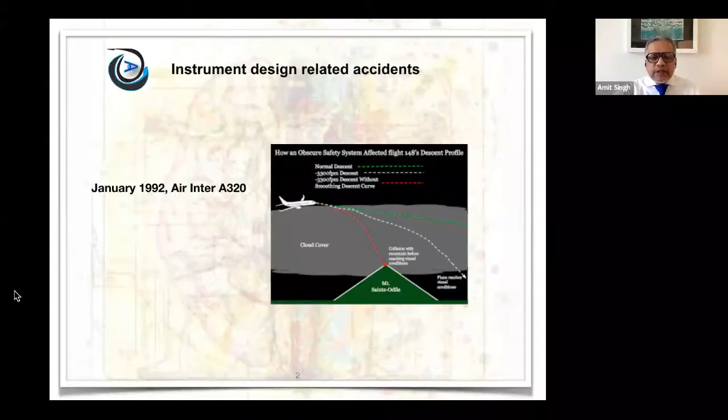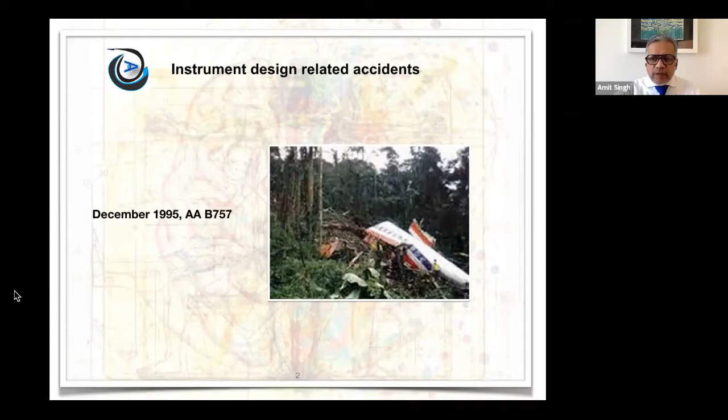This happened in 1990. Then we have the Air Inter, the famous one, when there was a confusion between the VS, the vertical speed, and the flight path angle. They dialed in the wrong one and descended fast, a CFIT accident. We have the Boeing 757 in Cali, where they inserted in the FMS the NDB name; as you know, there are multiple names in the FMS. They turned towards the wrong one, again a CFIT.

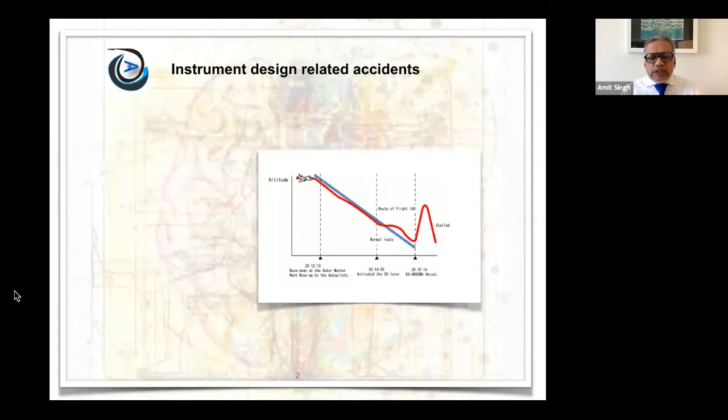And this is the Nagoya. This is on the final approach, and there was a mistrim issue. So the pilots were basically fighting against the controls, against the trim. And of course, at the last minute, there was an upset from which they couldn't recover. This was with China Airlines, Airbus 300.

Now, human error, everybody knows about human error. But are we ready to accept human error, or do we have a plan? Do we need to do something about it? There are statistics available: 87% of the accidents are attributable to human error. But the name as such indicts the pilot basically. So not much investigation has been done beyond just naming the human error. What was it due to? Was it preventable? And what was the situation that the pilot was in?

Why did all the barriers fail? And the pilot is, of course, the last barrier, and the last barrier also failed. That is why we had an accident. But a proper root cause analysis is not always done. Therefore, the easiest thing is to blame the pilot and carry on.

After the three accidents which I mentioned before, there was a lot of criticism about the interfaces with automation. Humans were used to mechanically driven aircraft, pulleys and cables, and they were in control. So they were motivated to fly the aircraft, and whatever inputs were there, the aircraft behaved as per that. With the introduction of automation, there were certain limitations. The pilot was moved a bit away from the actual controls. Maybe the pilot felt a bit demotivated. So what was the design philosophy behind that? That we need to see.

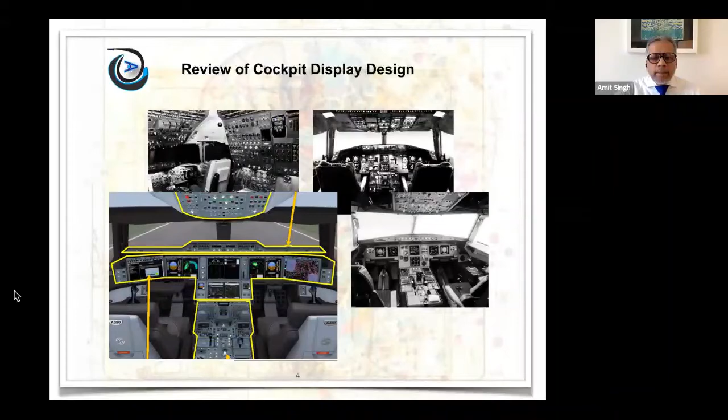Human error analysis, the famous adage, to err is human. So that is what the automation side wants to say. Humans will make mistakes regardless of whatever preventive efforts you take. So therefore, build something that can prevent the human from making an error, basically taking the human out of the design loop.

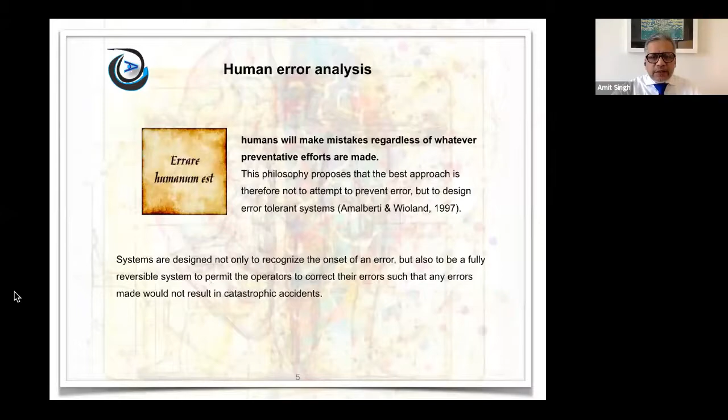So systems are designed not only to recognize the onset of an error, but also to be fully reversible systems to permit the operators to correct their errors such that any error made would not result in a catastrophic accident. So either you say the pilots will make errors and we have to make an error-tolerant system. Is it possible? We don't know.

Another philosophy is there is no empirical data to support the premise that to err is an inherent human trait. So it is just an adage, a saying, but what is the evidence? There is no empirical evidence. Human error is preventable, and the objective should be to design systems and create procedures or methodologies with the goal of reducing or eliminating human error. So the best solution would be something in between.

So while we are going through this presentation, you should put yourself in the pilot seat and see, with respect to automation and the flight deck design, where do you stand? Are you in total control? Is the automation in total control? Or what we just discussed, I said about a compromise, is that happening?

From the engineering perspective of flight deck design, there are 2 theories, theory W, theory Z. Theory W says that systems work because systems are well designed and scrupulously maintained. So this is favoring the engineers. Procedures are complete and correct. People behave as they are expected to, which is not always the case, and more importantly, do what they have been taught or trained to do.

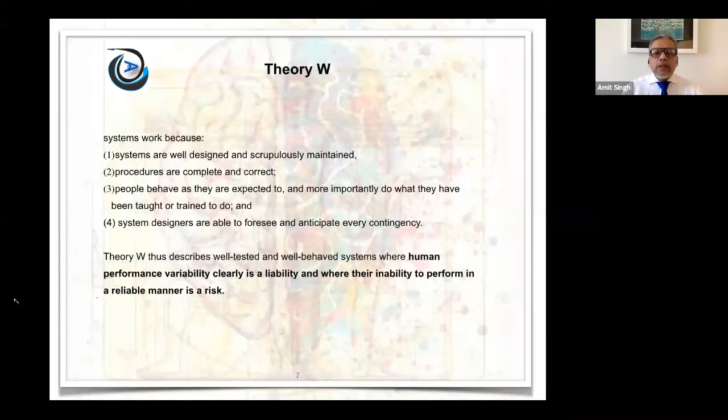Theory Z, which I'm sure a lot of you will agree to, is that systems work because people learn to identify and overcome design flaws and functional glitches. We have seen a lot of introductions, the Airbus 320, the OEM, the manufacturer, learned a lot from the airline because the airline was experimenting, or rather they learned and corrected a lot of things. With every introduction of new aircraft, we see these things happen. People can recognize the actual demands and adapt their performance.

Accordingly, people can interpret and apply procedures to match the conditions, and people can detect and correct when something goes wrong or when it is about to go wrong. Hence, intervene before the situation becomes seriously worsened. So we have that gut feeling, the sixth sense that something is going to go wrong.

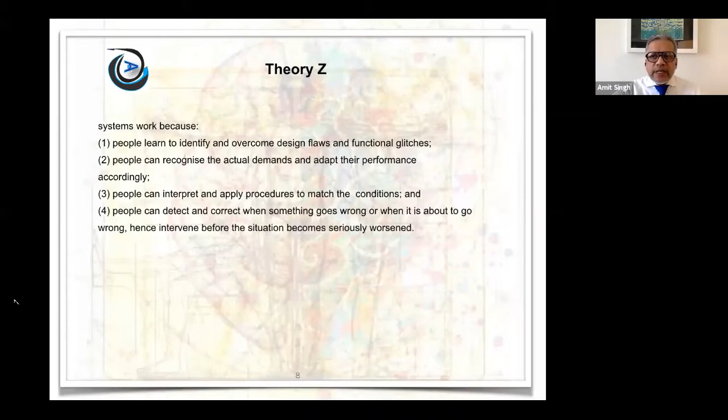From a psychological aspect, there is another very interesting thing which we will discuss later about how pilots adapt and accept the errors or drawbacks of the system and treat it as their forte. So they treat it as their strong point that we have overcome the system. So that's another psychological issue that we'll discuss later.

So to sum up, we can say Theory Z proposes that systems work because people are flexible and adaptive, rather than because the systems have been perfectly thought out and designed. So practically, this has quite a bit of truth. Humans are no longer a liability and performance variability is not a risk.

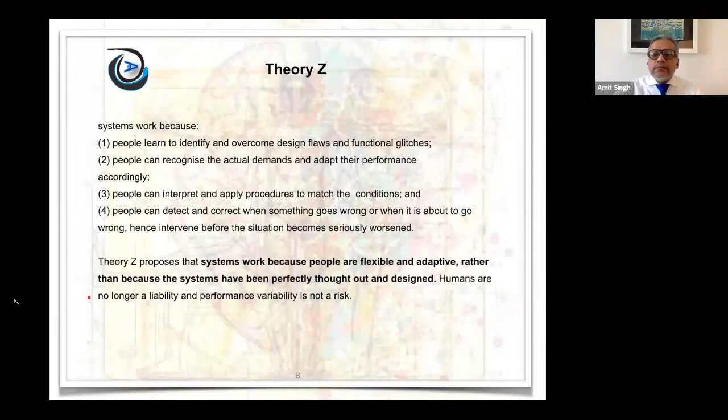Human factor engineering, the ideal thing, what I was talking about, they would like to say that your instrumentation and flight deck design should be as intuitive and natural, which means that you don't have to think too much before interpreting the indications. It should be a direct reading or a color-coded message, which gives you a clear yes or no, go or no go.

Because when you're cognitively overloaded in a high stress situation, your attention span is limited. So a lot of peripheral issues drop out if you are concentrating too hard on one particular aspect. We have seen it in a number of accidents: the warnings have been blaring, GPWS, but the pilots do not seem to respond, because the brain cuts out the sensors and directs attention to what they are concentrating on, maybe the instruments. So that is a cognitive function of the brain.

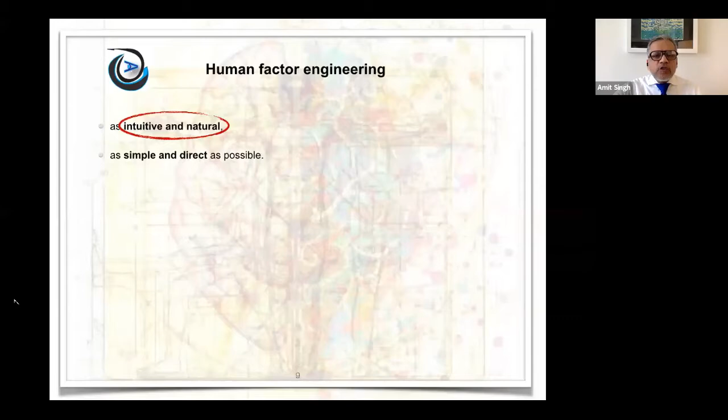It is important to know the limitations of the brain and then also design the cognitive part of engineering. This should be as simple and direct as possible. So a direct reading gauge is the easiest one. The only way forward is by recentering the cockpit design around the pilot's needs using cognitive engineering. This is from Thales. Well, they would say the ideal thing, but you think, does it always happen? Let's see what Rockwell Collins says.

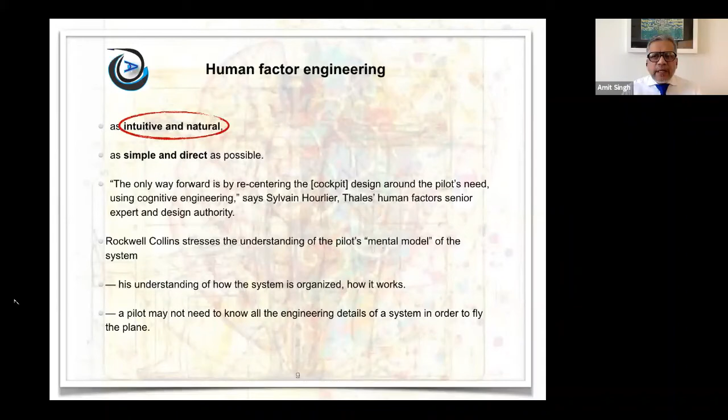Rockwell Collins. They stress the understanding of the pilot's mental model of the system, his understanding of how the system is organized, how it works. A pilot may not need to know all the engineering details of a system in order to fly the aircraft. So when we were flying the good old Boeing, people knew the nuts and bolts of the aircraft. The training was such, and people would like to dig in deep to find out how things work.

As fly-by-wire and more automation came in, the OEM said that things are too complicated, interconnected, so there is no need to know what's inside the system. Don't go inside the layers, just follow the procedures which have been given. Now, this basically demotivated the pilot because it took away the authority. Now you don't know the aircraft, you're just sitting there as an operator. It's like backseat driving, somebody's telling you what to do. So you basically switch off.

So after a number of years, because of complacency, or you could say erosion of flying skills, the accident rate increased, and then the OEM suddenly changed their philosophy. They said, no, you have to be in control. You should know these things. To this level, you should know your system. You should know the procedures, why the procedures were formed. So then there's a flip again. So it goes back and forth.

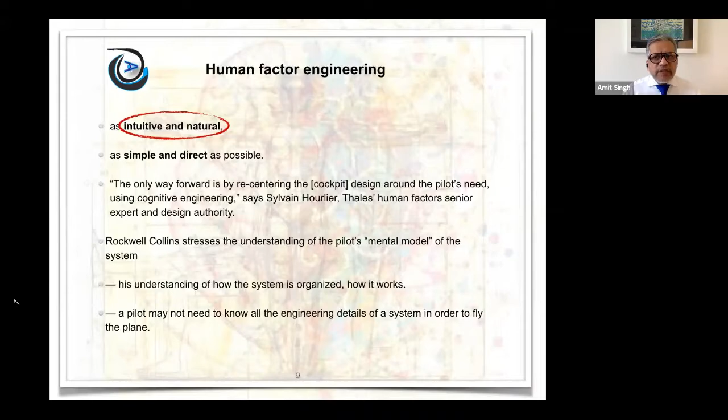But ultimately, the aircraft should be designed with the pilot in the center and with the pilot being aware of what's happening. We've seen that in the Boeing 737 MAX case also. We can discuss it later. Even though pilots were involved in the production engineering aspect, those who fly on the line also need to know what's inside. The level of knowledge should be free. It should be given, and the pilot should be given an option of how much deeper he can go.

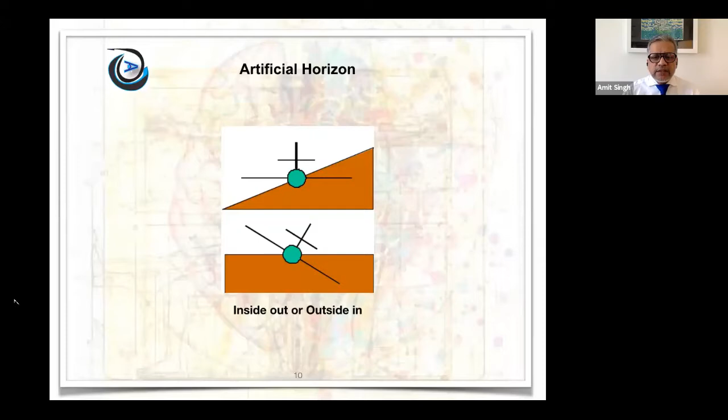This is the example I took, the artificial horizon, which is quite interesting. So this says inside out or outside in. There are two types of artificial horizons here. Either we are sitting inside the aircraft, see the aircraft level, and the horizon turns when we bank. Or we keep the horizon straight and the aircraft turns. So it all depends how you view. If you view from outside, the aircraft is turning. If you view from inside, the horizon is turning. So how does it affect?

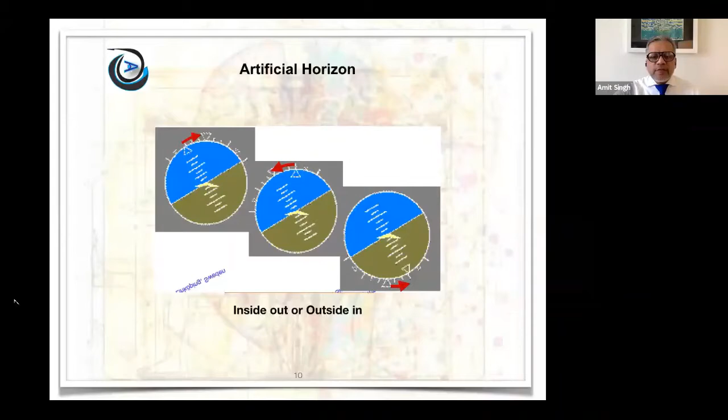Now we have three types of artificial horizons. The commercial aircraft, the second we can take as general aviation, and the third is military. In the commercial aircraft, the sky pointer or roll index moves in the opposite direction of the turn, which is the first one. So in order to roll the wings back, the pilot has to move the index in the opposite direction of the turn. The second one is general aviation, where the index moves along with the aircraft in the turn, so it comes back naturally. And the third is the military, where you have the earth pointer. The earth pointer is also supposed to be very safe. So how does this affect?

If you look at intuitive design, that is the first aspect we saw, that design should be intuitive, direct reading. So there is a dichotomy here when we compare the pitch: if you push the stick down, the aircraft goes down. Pull the stick up, the aircraft goes up. But in case of bank, it happens the opposite way in commercial aircraft. If you see the picture, you're banking right and the roll index is going left. So this is basically a counterintuitive thing.

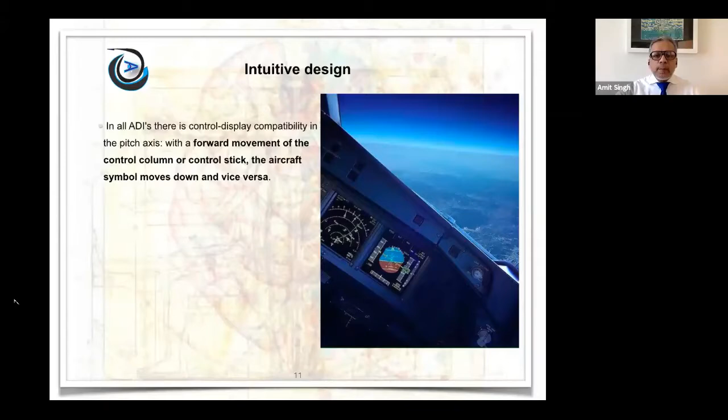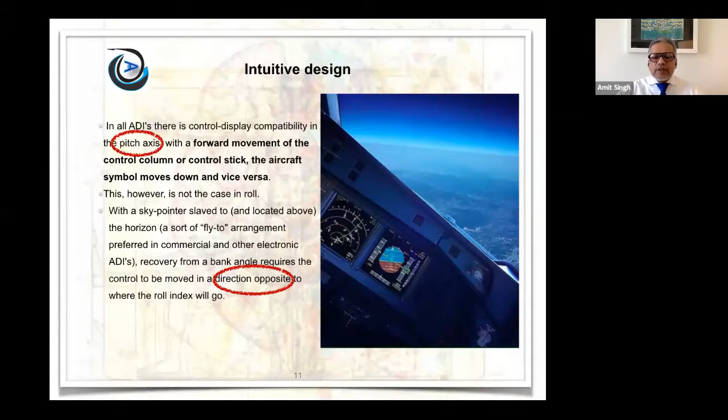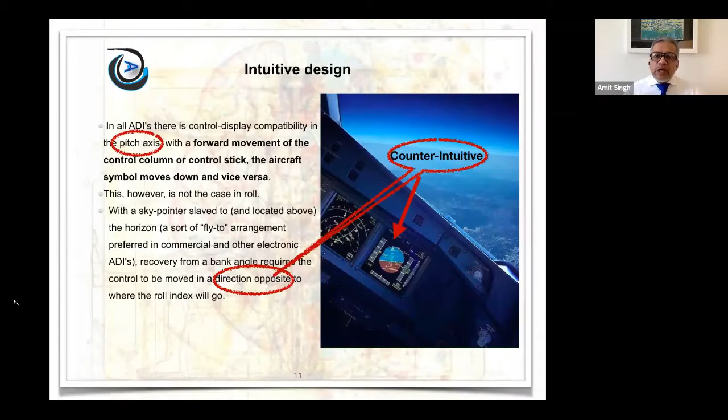So the stick moves intuitively, as we have seen: push the stick down, the aircraft goes down. That is not the case with roll. The roll is opposite in a commercial aircraft. So this is counterintuitive. In a high stress situation, this will not come out naturally and the chances of mistake are very high. But does this happen only in high stress?

So what needs to be thought of is, if this is well-documented research, a study, then why do the manufacturers persist with it? Is it because the military aircraft come from another region of the world and their ideology doesn't match with another region of the world? So is it a regional issue or an ideological issue? Because when the numbers are so high, 5 times, then it is a safety issue.

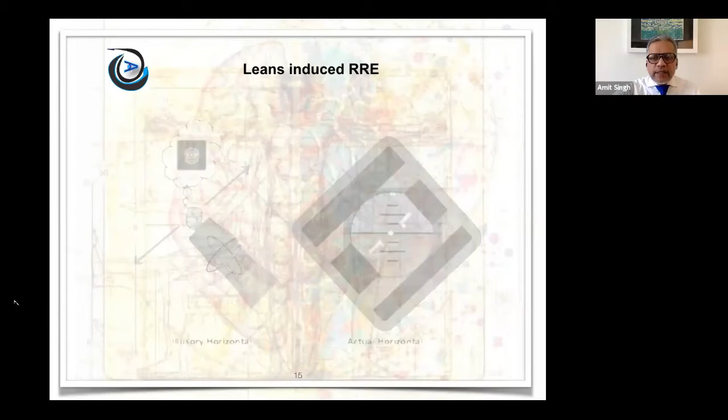Leans-induced reversal errors. Since a lot of pilots were unaware that this is a big issue: leans is a spatial disorientation. It is associated with a small bank, which is kind of neutralized by our sensory systems. If there is a small bank and the body, the vestibular system, gets used to it, we assume that we are flying level even though we have a small bank. So if we want to turn, this residual amount is added to what we were intending to add.

12% of loss of control accidents in transport and commuter aircraft, and 24% of fatalities between 1996 and 2010, were attributed to spatial disorientation, and leans is a leading cause for that.

There was an accident in which an aircraft took off. Soon after takeoff, the pilot introduced a 30-degree right bank, and thereafter he got distracted by some other thing. In the meanwhile, the aircraft rolled out and went towards the other side. The co-pilot, the pilot monitoring, called out bank, bank. So the pilot, assuming that he's still in the right bank, gave a left bank, which added to the bank. The aircraft stalled and crashed. So this is an issue. A number of accidents in commercial and general aviation have happened because of this.

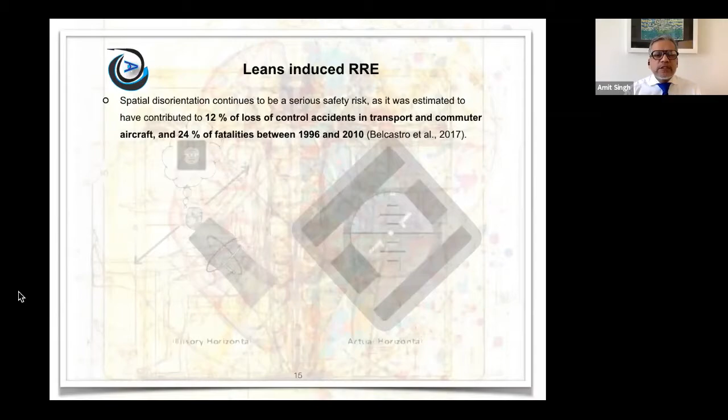The most prevalent form of spatial disorientation in aviation is the leans illusion. This is caused by the vestibular system being insensitive to low roll accelerations, leading to an incorrect sensation of bank angle. An incorrect expectation due to spatial disorientation may induce roll reversal errors. So if you are expecting a bank, because of expectation your cognitive dissonance plays up, and it adds up to the bank basically.

The accident at Patna of the Alliance Air Boeing 737 was inconclusive, but it could also be attributed to leans or roll reversal errors, because the aircraft went into a bank, then a steep bank, and stalled. Although it is not conclusive, it could be possible. It could be investigated from that angle. The presence of lean cues led to an increase of roll reversal errors by a factor of 2.6.

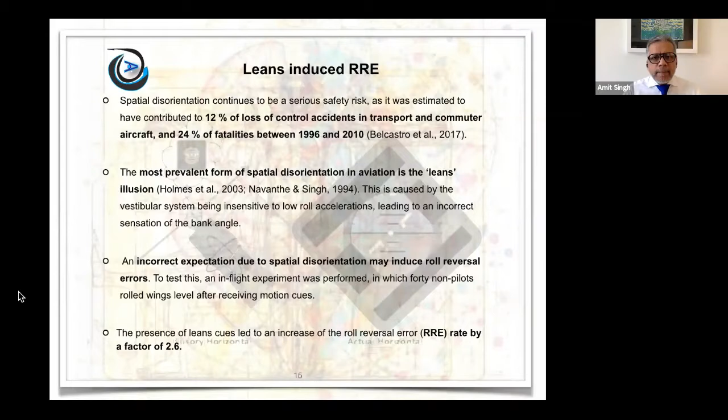From the cognition part, as I said, with the human-centered design philosophy, if the display design fails to account for human cognitive limitations, the result can be prone to errors, confusion, and inefficiencies. With the advent of the modern glass cockpit and the increased complexity of automation, it is basically not the complexity of automation, it is

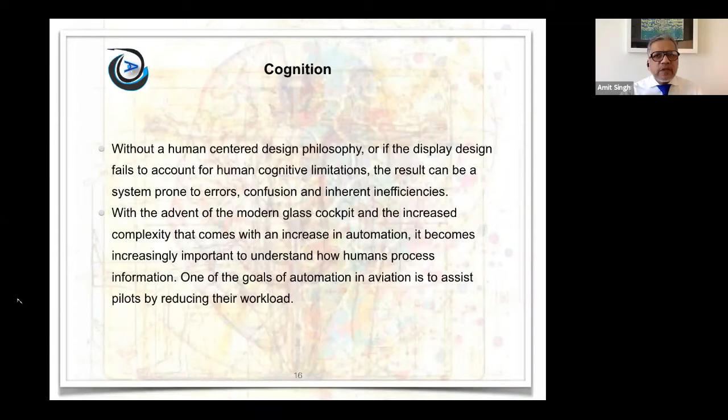interconnected systems which the pilot is not very sure of, because he's not been given too much information. So if one system is operated, from which all sensors are taking sense, the pilot is not sure. So the pilot is very wary of making too many inputs in the system, not very confident about the automation.

This is a human error template UK survey from Cranfield University, which says that 79% of pilots have reported they have made errors in selecting the heading and the speed knob. So instead of the heading, they've pulled speed, and for turning left, they turned the speed knob left, which amounted to a decrease in speed. So that is the highest. So why are they placed next to each other? That also needs to be questioned. Similar knobs.

In the 1940s, people started saying that most of the human error accidents are not human error, they could be design errors. There were aircraft which had similar looking knobs for both landing gear and flaps control. So there were a lot of incidents after landing. Instead of retracting flaps, the landing gear would go up. So these were design issues. It's just how deep you go to investigate.

Next, if we see incorrect baro setting, which is very common, 45.7% of the pilots say we have done this. Monitoring the glide slope or failing to arm the approach. So these are certain errors associated with automation which are happening, but nothing much has been done. So maybe on the next generation aircraft, a new barrier will come up.

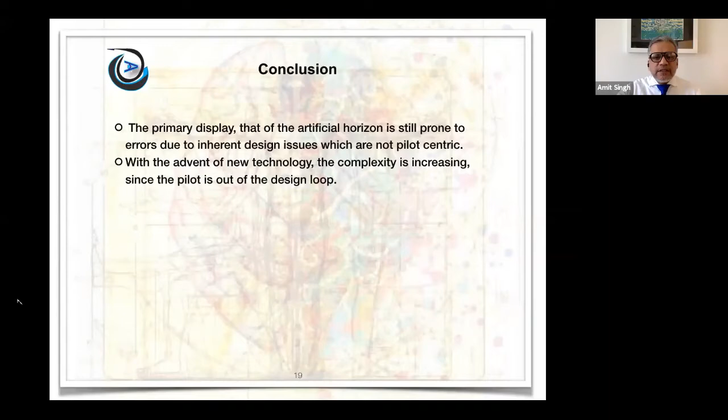Now, industrial psychologist Bainbridge wrote this line, which says the irony that the more advanced the control system is, so the more crucial may be the contribution of the human operator. This is very interesting. The reasoning was that in an automated system, the human operator would be called on only when things go wrong and would therefore require more skills and knowledge than an operator doing ordinary work.

So if you're flying the machine manually, you are with the machine. But if things become too complicated with complex automation and interrelated systems, when things go wrong, the pilot has to use more knowledge and cognitive power, situational awareness, to deal with the situations. So the failures will become more complex with a high level of automation as compared to earlier times, where there was simpler automation and the pilot was in the center. And last but not the least, new tools mean new risk.

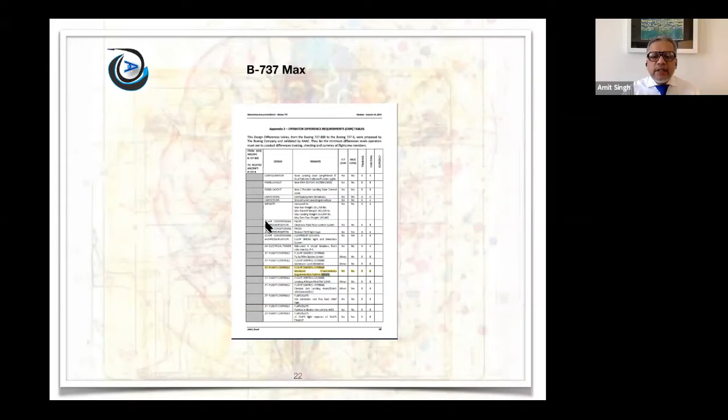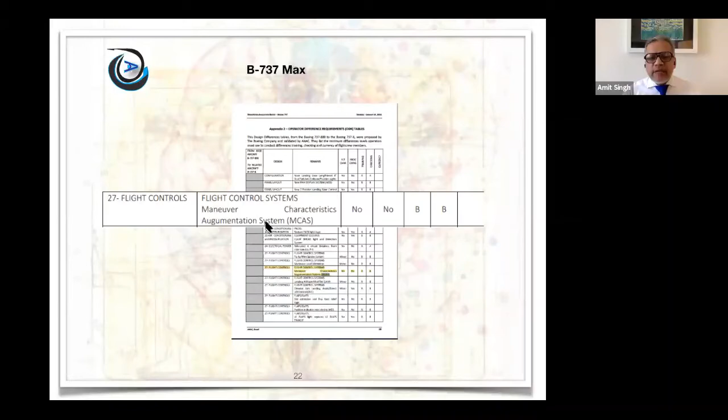So I wrote a blog, basically. I put out this, this is called the ODR table, Operator Difference Requirements table, when a new aircraft is introduced. So the Brazilians, since they manufacture an aircraft, they have a team in place which will examine the new aircraft. They examined the MAX along with Boeing. So based on Boeing's recommendation, they introduced training for pilots. So this says flight controls MCAS type B training. So they had training from the beginning. So why did Boeing not introduce training for the rest of the world? Nobody knows. So this is one thing interesting.

So when I wrote this blog, then of course, something had to happen. Interestingly, Boeing wrote back. So Boeing denied everything, that your blog is incorrect, there is nothing to do with the previous generation accidents. And at the end, they wrote, as our customers and their passengers continue to fly the 737 MAX to hundreds of destinations around every day, they have our assurance that the 737 MAX is as safe as any airplane that has ever flown the skies. And soon after that, we had the Ethiopian accident. So things happen, but known design defects are ethical issues. So the pilot has to be informed. That is what I try to imply through this.

Right. Okay, so moving on to the questions, we have a question from Vishal where he says the leans is one of the most common forms of disorientation and causes accidents too. So how do we deal with this particular aspect? Well, as the survey said, it has to be intuitive. So if you are banking left, your index has to go with the bank. So you have basically, it is very simple. You have to change the orientation from what we described as commercial to general aviation. But ultimately, it boils down to recertification of the thousands of aircraft which are flying commercially. So it is basically dependent on the regulator to take a stance that this is not acceptable to us since it is a potentially unsafe situation.